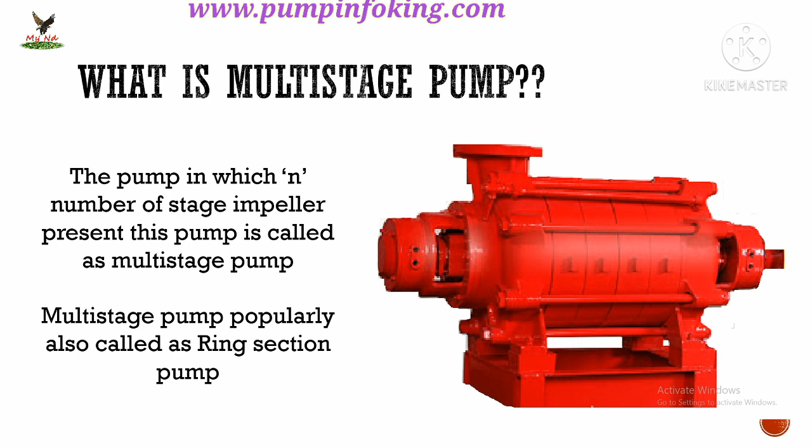This is the general arrangement drawing of the multi-stage pump. We are looking at some important parts. First part is the stay bar, which is the main fastener of the multi-stage pump. Its main function is to tighten the whole assembly.

Next part is the gland cooling. These are the gland cooling piping. The function of the cooling piping is to provide cooling to the gland packing, to prevent burning, and also to prevent sucking air from the gland.

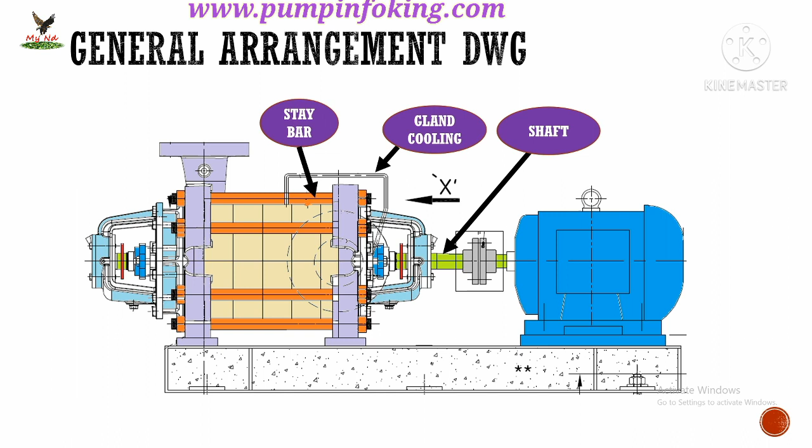Next is the shaft. The shaft is the rotary component, as a kit with the impeller, balance valve, and the coupling.

Next part is the deflector. These are the water deflector. The main function of the water deflector is to prevent water from going inside the bearing.

Next part is the bearing housing. The main function of the bearing housing is to provide support to the bearing.

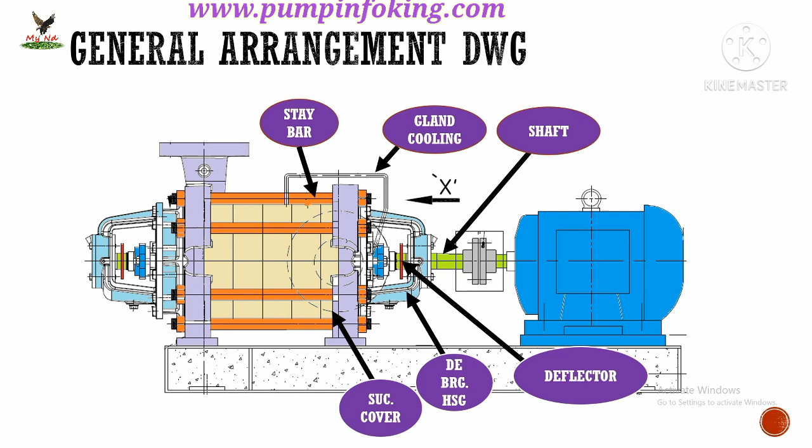Next part is the suction cover. These are the suction cover. Next is the middle body. These are the delivery cover.

These are the non-drive end bearing housing. These are the balance valve. The main function of the balance valve is to balance the axial thrust.

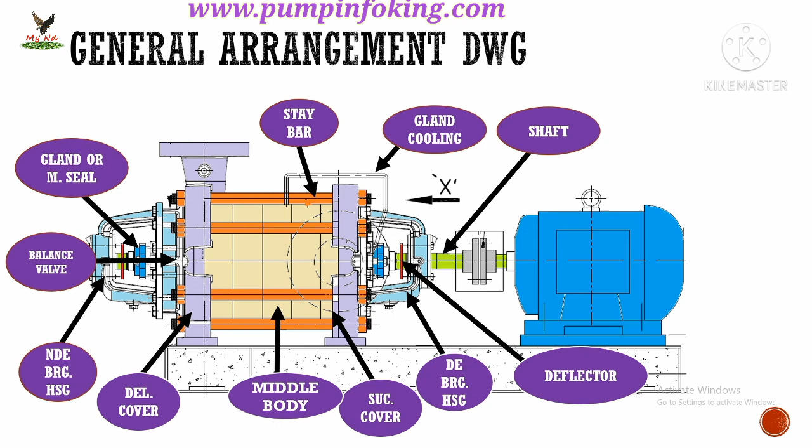These are the gland or mechanical seal. Next is the cross-section drawing of the multi-stage pump. This cross-section drawing shows the internal parts of the multi-stage pump.

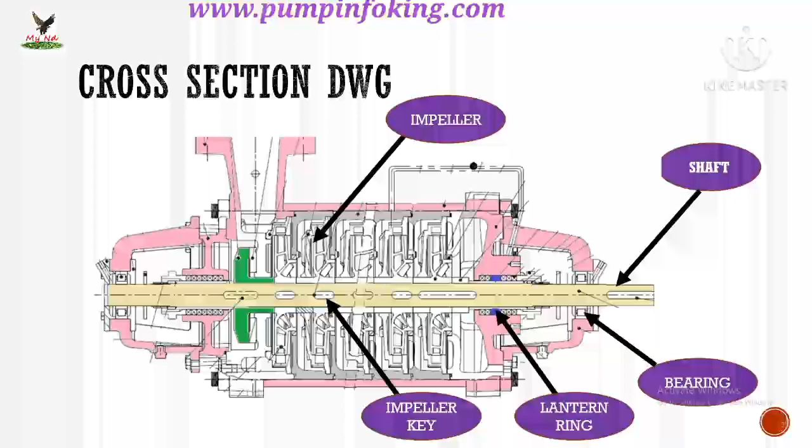These are the impeller, shaft, bearing, lantern rings meaning a lock ring, impeller key, balance valve key, and this one shown in green is the balance valve.

What is the main function of the balance valve? The main function of the balance valve is to balance the axial thrust at the delivery end. The balance valve balances the rotor movement and protects against internal rubbing.

The balance valve flow is the do not restrict flow, meaning a free flow. It passes to the sump or again passes through the suction line.

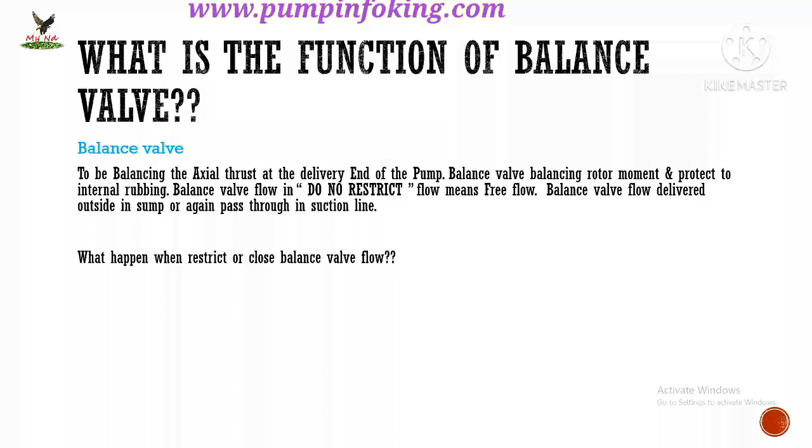What happens when we restrict or close the balance valve flow? After restricting the balance valve flow, axial thrust goes to one side and the balance valve and impeller start rubbing. As a result, temperature rises, internal wearing increases, power consumption increases more, and there is a chance to burn or stall the motor. The pump will jam.

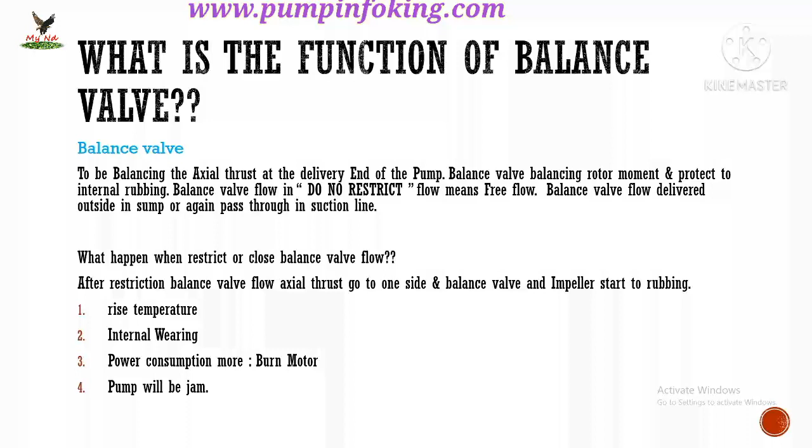These are the causes when we close the balance valve flow.

Working principle of the multi-stage pump. These are the multi-stage pump stages: first stage, second stage, third stage, fourth stage, and this is the fifth stage. This means this is a five-stage pump.

So we are taking an example here. Suppose one impeller's head is 20 meters, flow is 30 meter cube per hour, power consumption is 5 kW, and efficiency is 50%.

So how much is the final stage, meaning fifth stage, flow and head? Let's calculate. Final outlet head equals 20 into 5 equals 100 meters, because one impeller's head is 20 meters, and we multiply by the fifth stage. So our final outlet head is 100 meters.

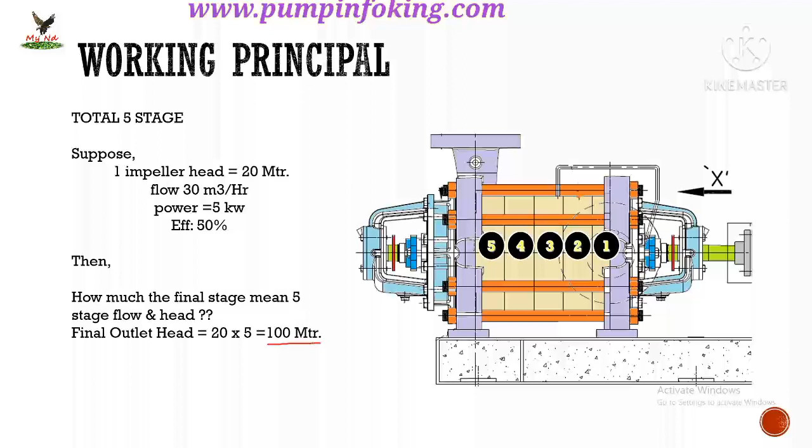So how much is the final outlet flow? The first impeller flow is 30 meter cube per hour, so our final flow remains the same, that is 30 meter cube per hour.

Power consumption of a single impeller is 5 kW, so we multiply here 5 into 5, meaning 25 kW. So total power consumption is 25 kW.

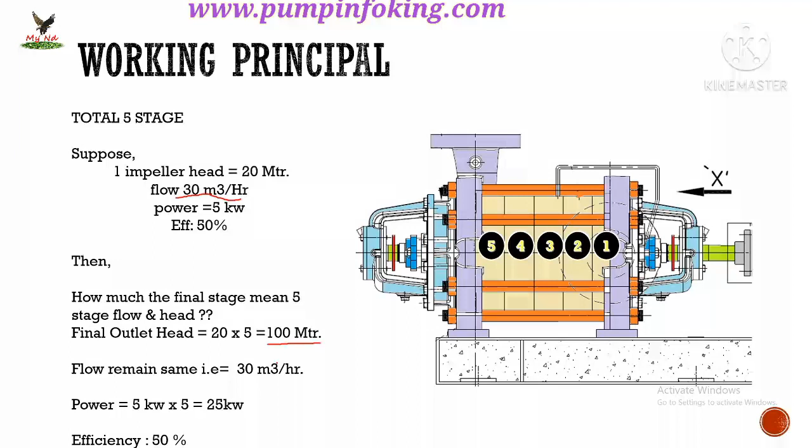And the efficiency remains the same, meaning 50%.

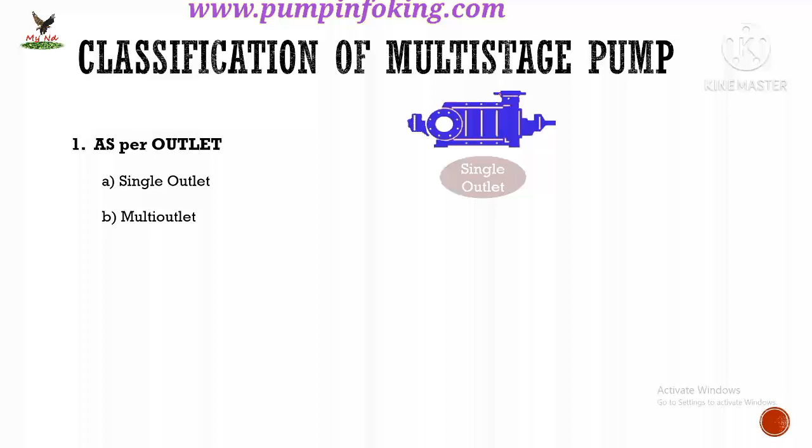So what is the classification of the multi-stage pump? The classification of the multi-stage pump as per outlet: first is the single outlet pump, which has only one outlet. Second is the multi-outlet pump, which has a first outlet and a second, or final, outlet.

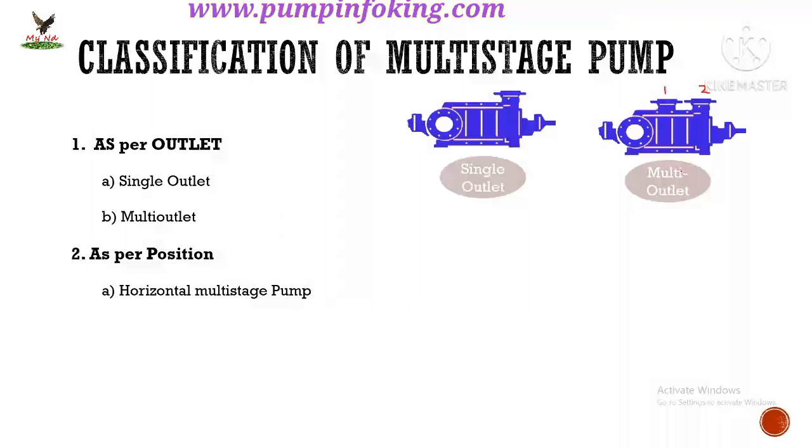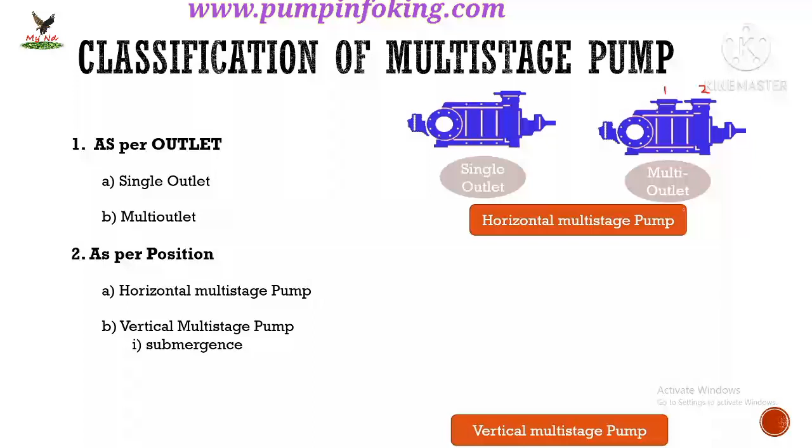The classification of the multi-stage pump as per position is horizontal multi-stage pump and vertical multi-stage pump. The vertical multi-stage pump is classified into two types: submergence type, which works in submerged condition, and non-submergence type, which are dry pit pumps that are not under water.

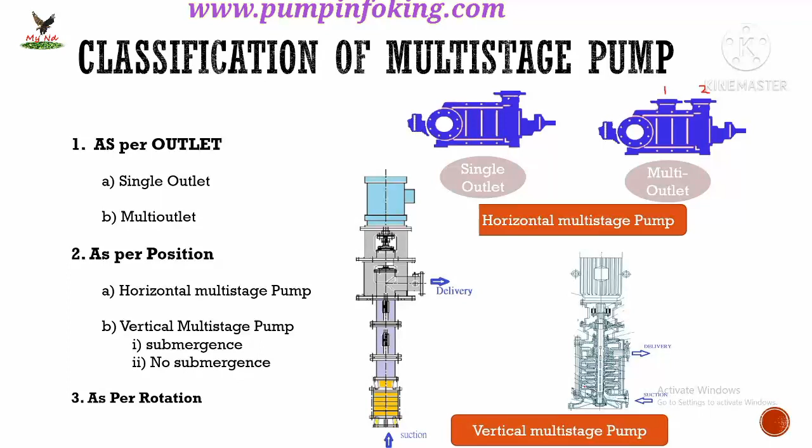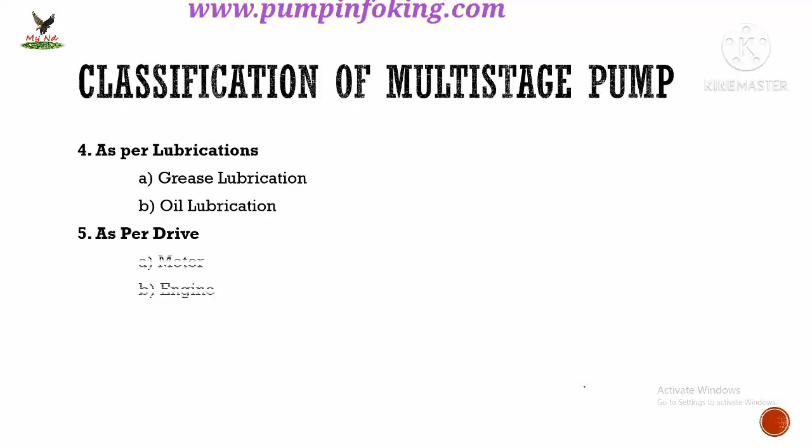The classification of the multi-stage pump as per rotation is clockwise and anti-clockwise pump. As per lubrication, grease lubrication and oil lubrication. As per drive, motor driven pump and engine driven pump. As per shaft sealing, two types: mechanical seal type and gland packing type.

So now we are looking at the multi-outlet multi-stage pump. This pump has two outlets. If a pump has more than one outlet, it is called a multi-outlet multi-stage pump. This pump is normally used in the building sector for firefighting application.

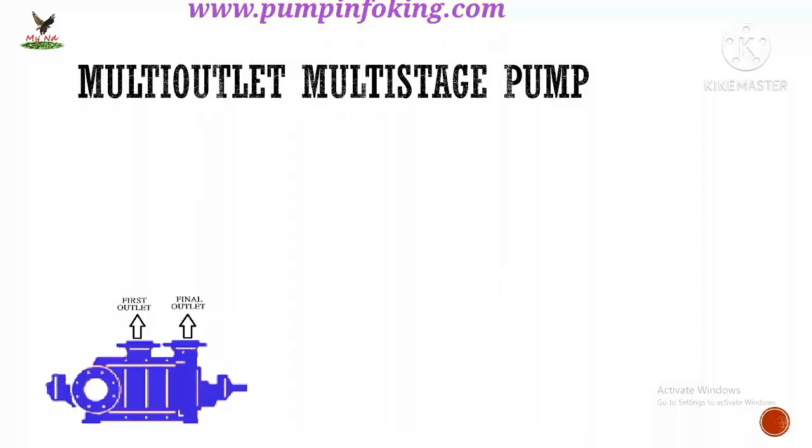Suppose we take an example: this is a 15-floor building and we are installing a multi-outlet multi-stage pump here. If fire catches up to the 10th floor, we take the flow and head from the first outlet. If fire catches above the 10th floor, we take the flow and head from the final outlet. This is the best application of the multi-outlet multi-stage pump.

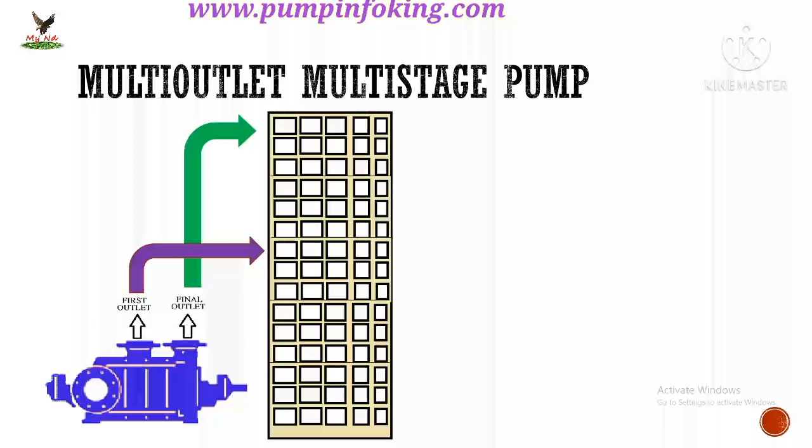The multi-outlet multi-stage pump covers multiple duties. These pumps are energy saving, because if fire catches below the 10th floor, we take the flow and head from the first outlet, so automatically our power consumption is lower than with the final outlet. There is also low floor space requirement, because we are using a multi-outlet multi-stage pump covering multiple duties in a single pump.

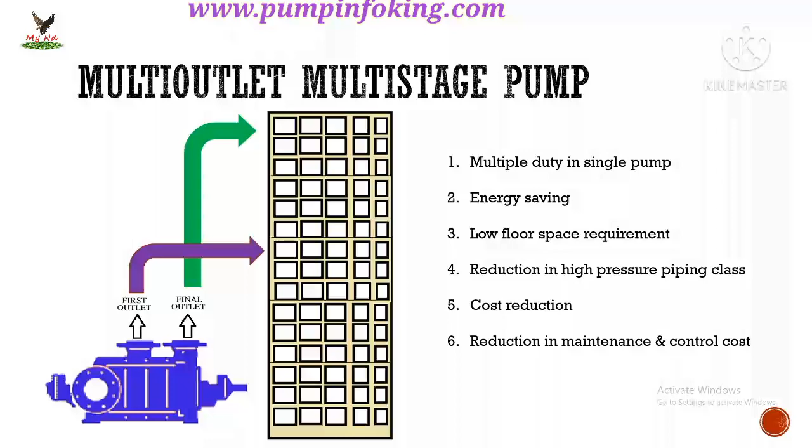The requirement of more than one pump is covered in a single pump, so there is low floor space requirement. There is also reduction in high pressure class piping; when the high pressure piping class is low, this affects the cost positively. There is also reduction in maintenance and control cost, because we are using a single pump that covers multiple duties, so we only have the maintenance cost and control cost of one pump.

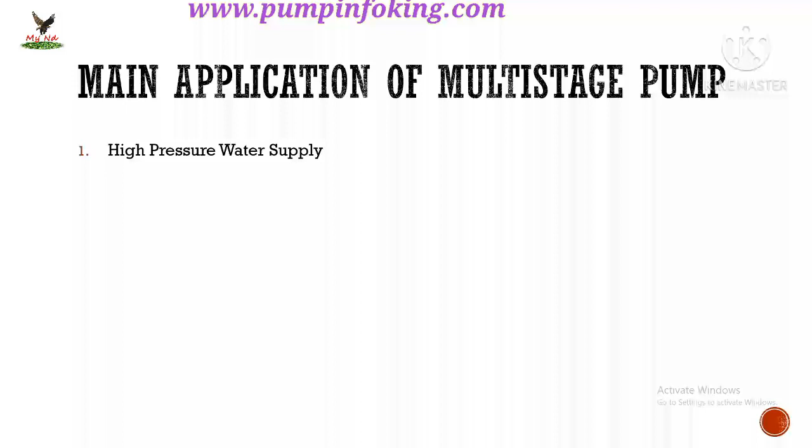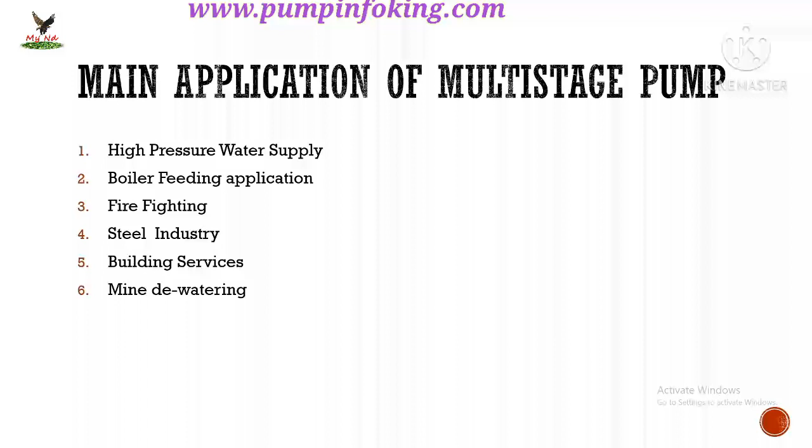Main application of the multi-stage pump: multi-stage pumps are used in high pressure water supply, boiler feeding application, firefighting application, steel industries, building service sector, mine dewatering, high pressure cleaning, and seawater application. These are the main applications of the multi-stage pump.